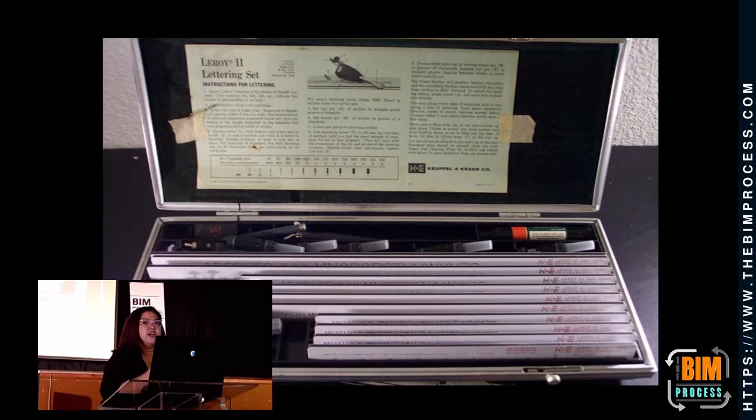So when I received it, I was so proud that it was passed down to me, because we also had other people in our family pursuing architecture and engineering. And I always look at it, and I can't help but think that that thing, in the old days when we had no CAD or BIM, was an innovation come to life.

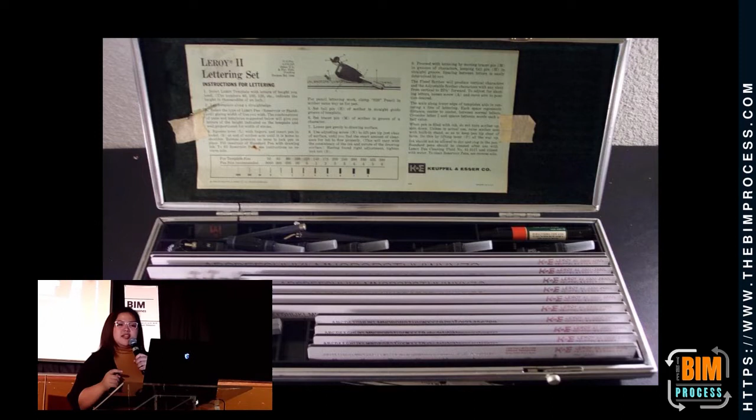And every time I look at it, I imagine all the times this stencil set has made my uncle's life easier. A simple thing helped millions of AEC professionals throughout the generations. And why was it made? Because there was a great need for such a tool in the old days.

In the old days, everyone drafted everything manually, and lettering was a great part of it. And in the times when you need uniformity, or your new drafters are not very good at lettering, this simple tool saved lots of architects and engineers' assets.

This gift of curiosity has inspired me to swim along with all the new innovations. And this is where I started growing more and more curious and explorative.

Throughout college, I incorporated different new technologies in my designs, even when people laughed at me, or my professors kept telling me, that's too expensive, that's not feasible. I got low grades for doing it, but I didn't give a shit.

I wanted to explore, and I won't let anyone get in my way, even though I'm so scared of failing, because it's my uncle that pays my tuition fee. And it's okay.

And in my thesis, I went all in. I designed a prototype, self-sustaining floating resort and marine observatory. That's so long, oh my god. Packed with all the latest technology.

And you know what I got for that? I got a 1.75 grade, because one of the jurors said, this is word for word, I will never forget what he said: 'I don't know what you're doing, so I can't give you a one, but I also can't fail you, because I don't know what you're doing.' And then he proceeded to write a three.

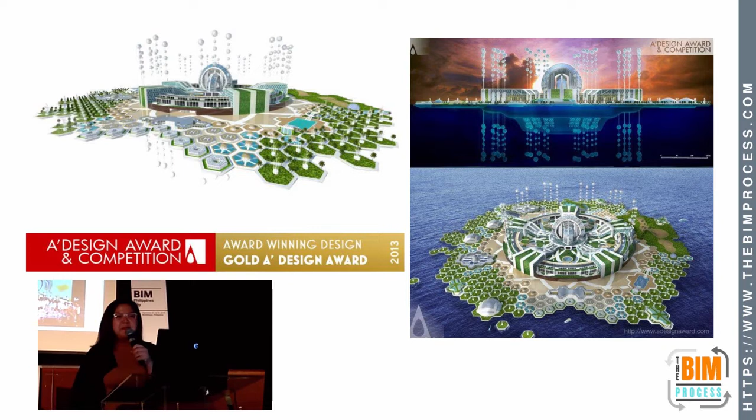I was pissed. But a year later, an opportunity came around and I was nominated for A' Design Award, and I won gold. I won the Gold A' Design Award for Modern Design.

And months later, I received an email from NCCA that I have to receive an Ani ng Dangal for winning in Milan. And this is where I realized that I will not let anyone who doesn't know what I'm doing get in my way. I'll keep exploring. It's my purpose to keep exploring.

And this is also where I realized that I need to share my gift of exploration with others. So here I am.

And when you come to think of it, this is all because of my Leroy stencil set. You see, along my journey, I also realized this: it's important that every one of us in the industry learn, observe, and appreciate the technological advancements throughout the generation, even in the past, the history of our processes. Because this way we will understand why we have the technology we have right now, and why we should pursue and champion the use of these new innovations.

Where am I going with this? You see, a lot of my students, before they enrolled in my classes, were terrified, overwhelmed, scared of all this new technology because it all seems too daunting, it all seems too much. And this is what I always tell them: all the things that have come out, the new softwares, the new applications, the new developments, they are all invented and developed for a need, as tools to make our lives better.

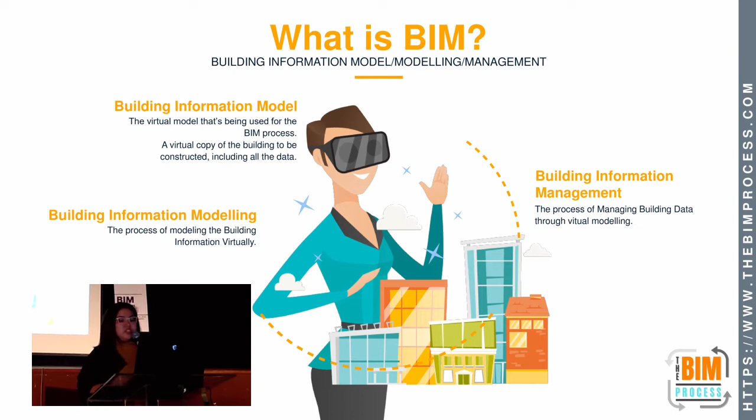A building information model is basically the virtual copy of the building to be constructed, but in its own way it's more detailed. But it's more than just that. A BIM model has embedded data inside every component - every information in the project, such as specifications, manufacturer data, design data, profiles, types, spacing, uses, functions, and more. It all depends on what's needed in the projects. That is the I in BIM, information. And in a way, you can also look at it as a means to model the building information.

And if done correctly, you will be able to use that model to automate tasks such as making construction schedules, cost estimates, procurement plans, and design calculations. You can also perform other crucial tasks such as clash detection, design simulation, climate analysis, structural analysis, systems analysis, cost simulations, and construction simulations. Now, there's something else I want to tell you about BIM.

BIM is not a software. It's not just a software. It's not Revit or Tekla or Bentley or SolidWorks. It's not a single software. It's a process that uses several different softwares to be able to construct a building virtually and automate the task.

Just imagine graphic design. You can't be called a graphic designer if you only know Adobe Illustrator. It's the same thing with BIM. You can't be called a BIM specialist if you only know Revit. That's not the same thing.

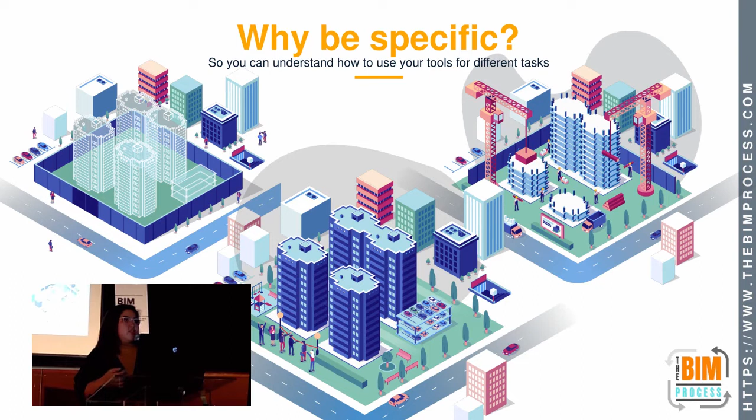So to understand a little bit more about the possibilities of the BIM innovations, what we will be discussing today is the pain points and how technology answered them. And to make it a little bit easier to digest, we'll take our journey throughout the project lifecycle. There are three basic project lifecycle phases: the construction phase, the design phase, and the operation phase.

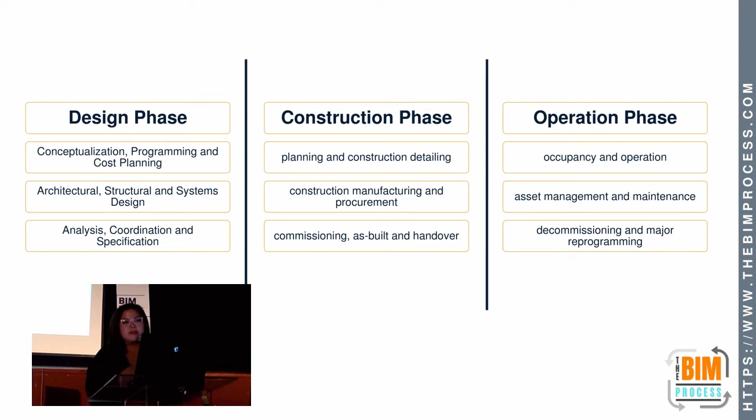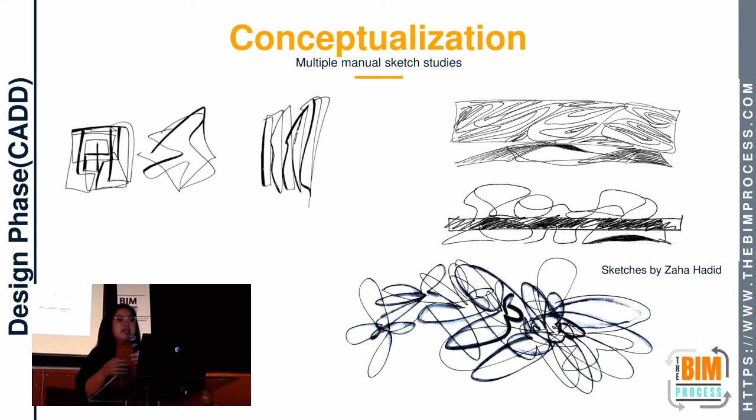In the design phase, we would start with the conceptualization. Once we received all the criteria, requirements, and other considerations from our clients, then start researching, sketching, brainstorming, and making space programs, matrices, bubble diagrams. It's usually a long creative process depending on the project size, and there's nothing wrong with it actually.

I still do this a lot of the times, but it could be better. We can have better tools that can help us visualize our concepts better.

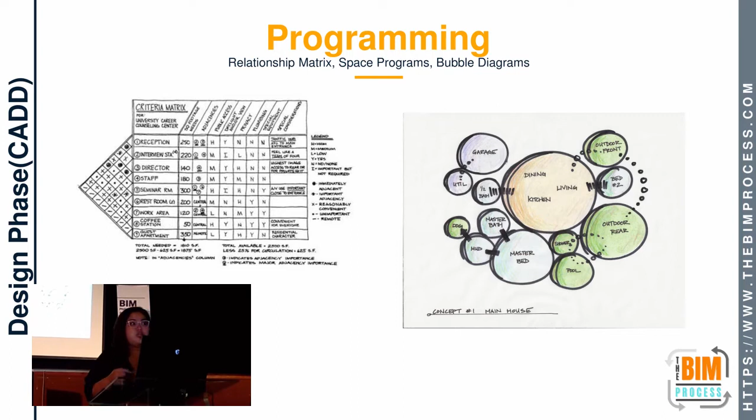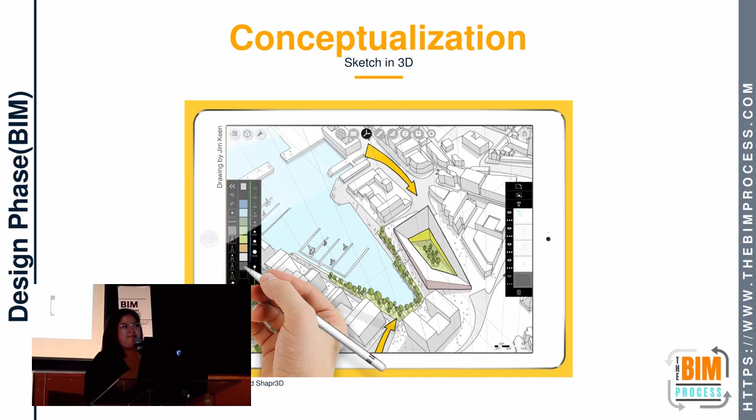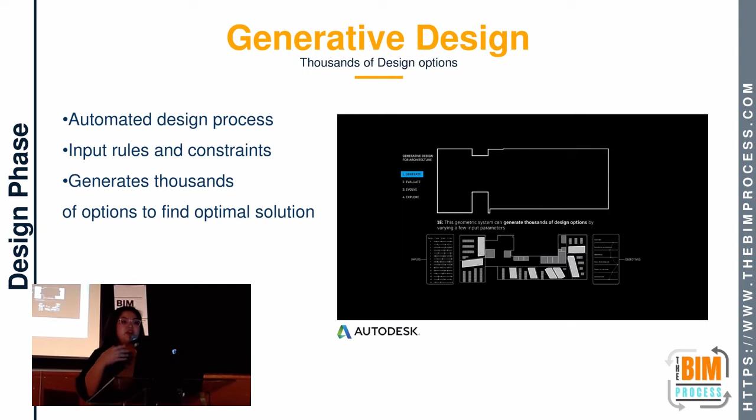But let's take that a little bit further. There's this new development in BIM called the generative design. This is basically artificial intelligence BIM. It's an iterative design process where you as a designer or a programmer inputs the rules, criteria, constraints, along with other factors such as performance requirements, functions, spatial requirements, spatial relationships, environmental requirements, cost constraints, and others. While the program generates a number of outputs to find the optimal solution for you.

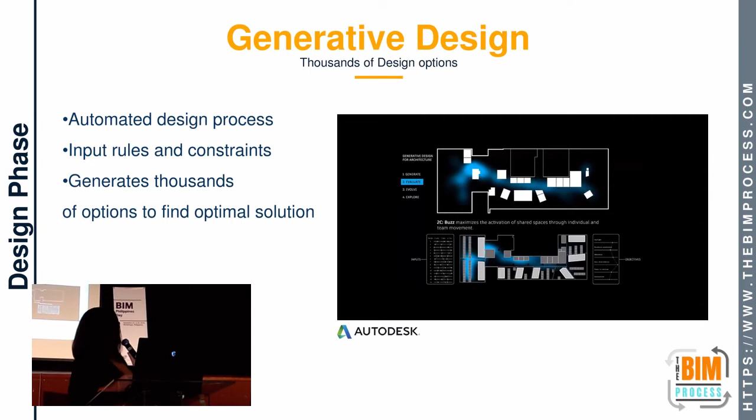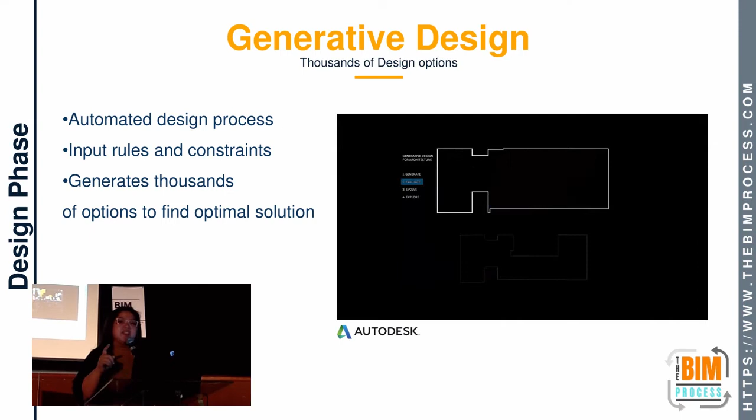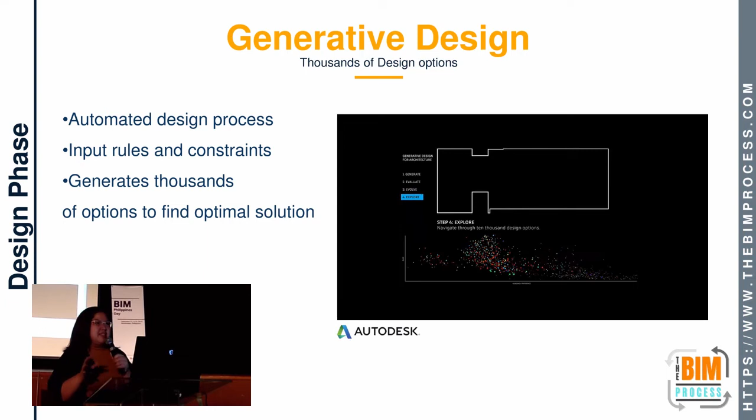Here's a fun fact. The video you're seeing right now is how Autodesk designed its Toronto office. So it is possible for a computer to take in all your thoughts and try out options for you. But this development is still in the early stages and mostly still experimental. But maybe in a couple of years it could be available to all of us.

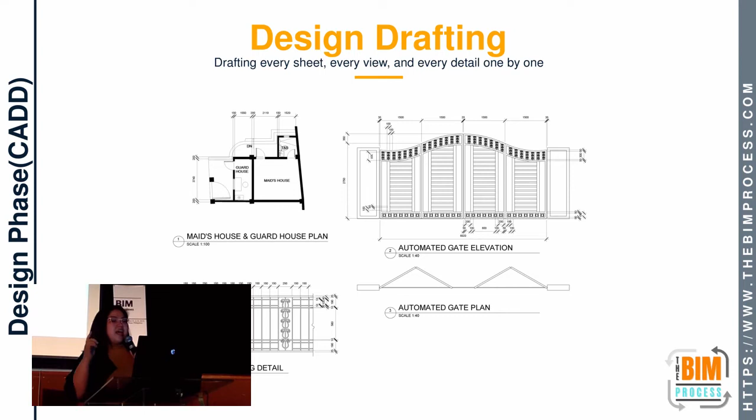So let's go to another pain point. Design drafting. Ever tried manual CAD drafting? It hurts. The way you have to draft every single view, every single detail, every single sheet from scratch, every time, one by one. That's so much. And what happens when you get revisions? You have to update every single sheet again, one by one. Be careful, you might forget something, but before you finish, your client comes with all new revisions. How does that feel?

But no, we don't really need to see the latest and the greatest technology. The very basic process of BIM answers this problem already. With the BIM process, and BIM softwares, all drawings, views, and details are derived from a single model. And a change in the model reflects in all the views and sheets instantly. Simple, fast, efficient, and when you get revisions, much easier.

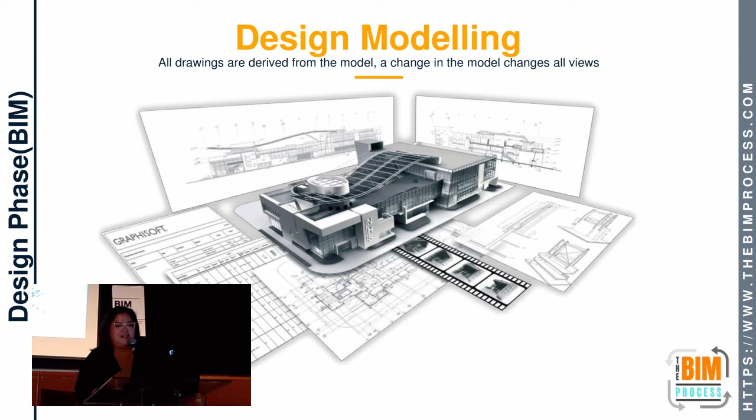Now here are the construction problems. With inefficient project planning, it affects the construction budget by a lot, to a point that it has been a normal practice for construction companies, for their protection, to allot a large percentage of the project budget, anticipating these mistakes when estimating costs. And even with that, a lot of the major constructions still go over budget.

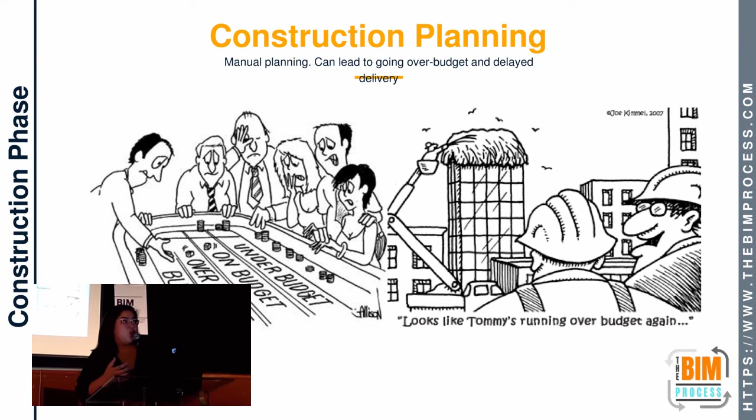And what about mistakes? Lots and lots of mistakes because of bad collaboration. I mean, seeing a cloud in your ceiling? Come on.

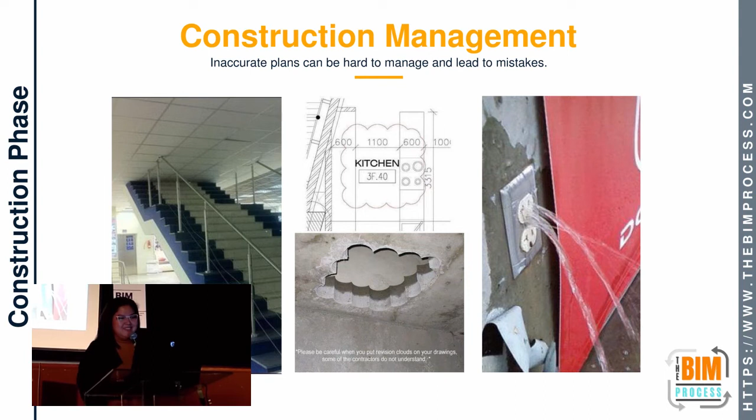Now let's see how these problems are answered with BIM.

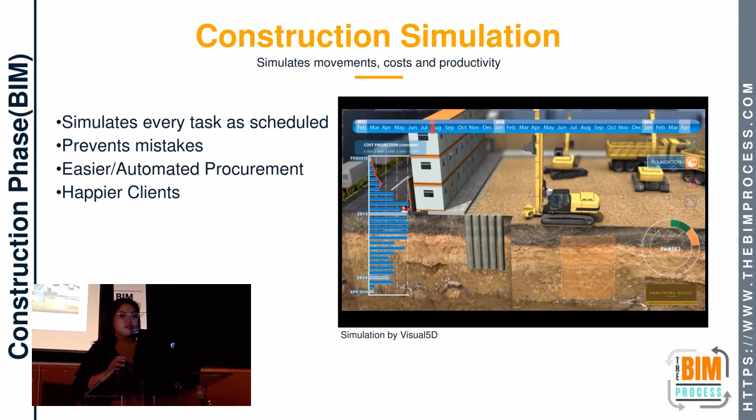In BIM, you can schedule the whole project phase by phase, schedule procurement for your materials and requirements week by week or day by day as you want it, get all your quantities in minutes, and also simulate the whole construction to anticipate any problems and plan every major movement every step of the way. You can plan your whole construction to the tiniest detail in less time. And as long as the models are done with that in mind, you can even automate the scheduling.

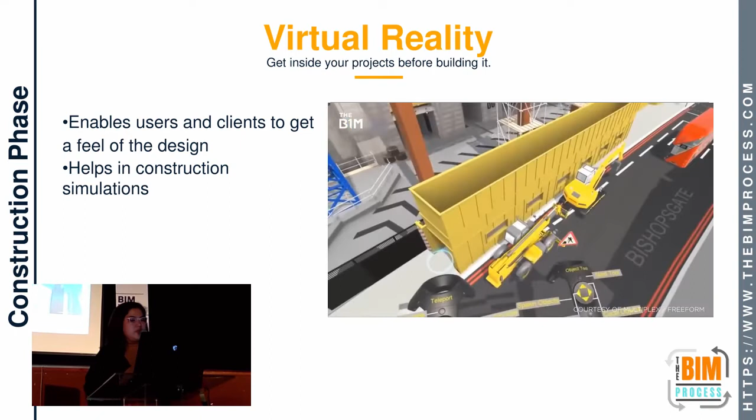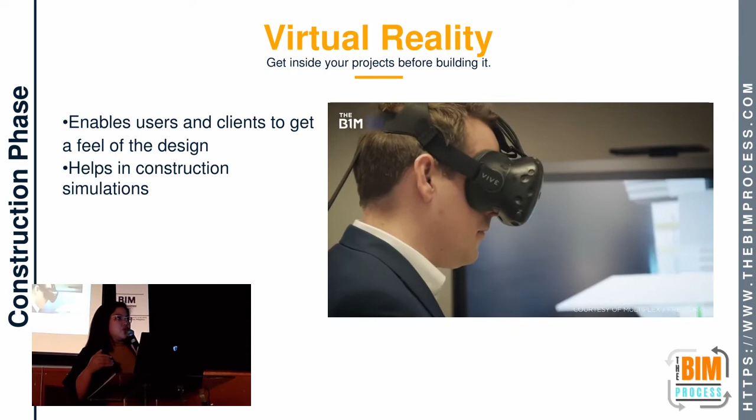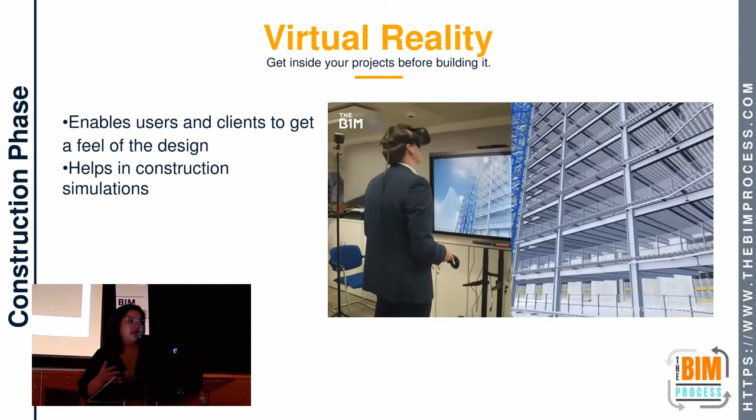Now another thing would be the virtual reality technology. This also allows the stakeholders to step inside the simulation and see how the construction should go in real life. This allows stakeholders to get a feel of the design and see the construction simulation virtually before they decide on anything or to start construction.

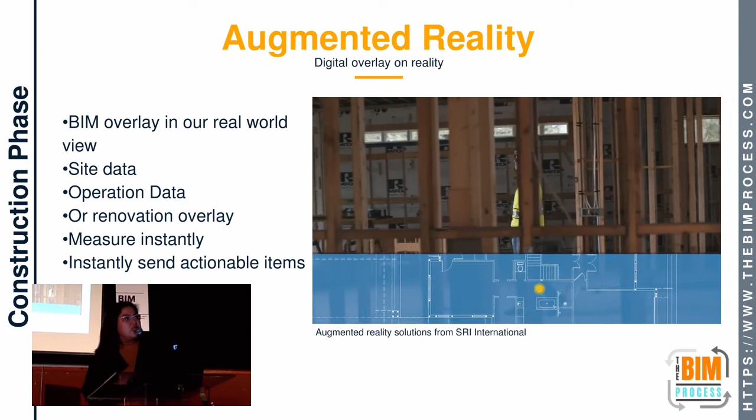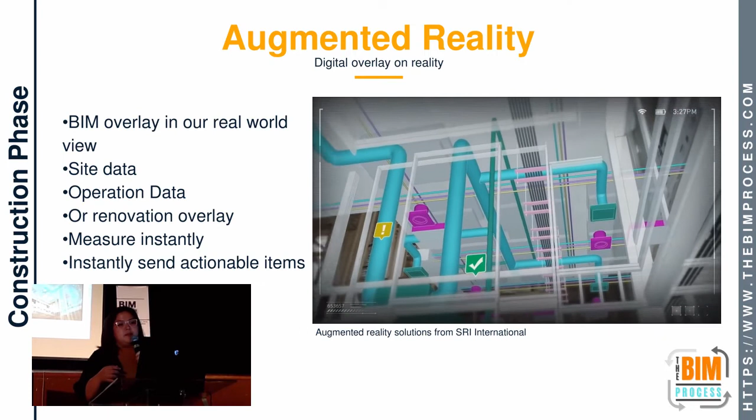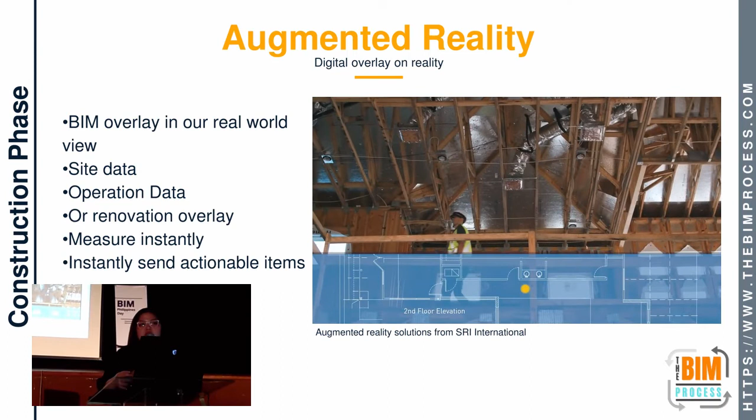And during the construction, we have augmented reality. AR applications can accurately track your location inside the construction site. You can also overlay the BIM model over what's being built to make the inspection easier. You can also measure automatically, and when there's any mistake, you can capture this data and share it instantly to other stakeholders. This prevents major structural errors. So if you can see there, there are overlays that alert them for mistakes.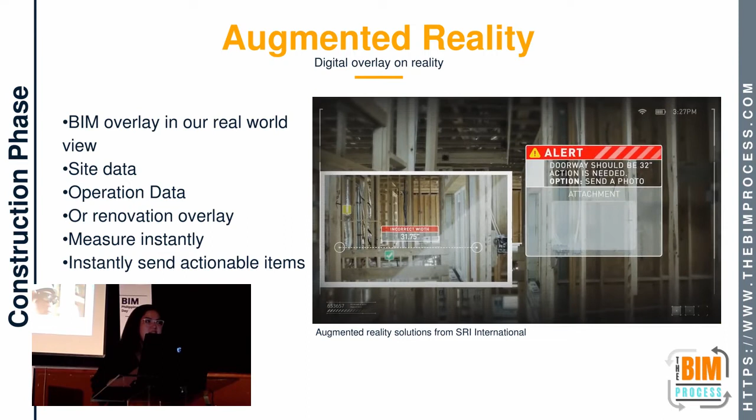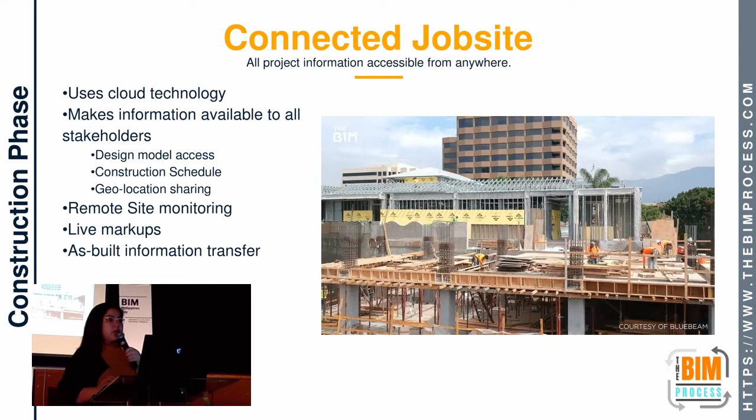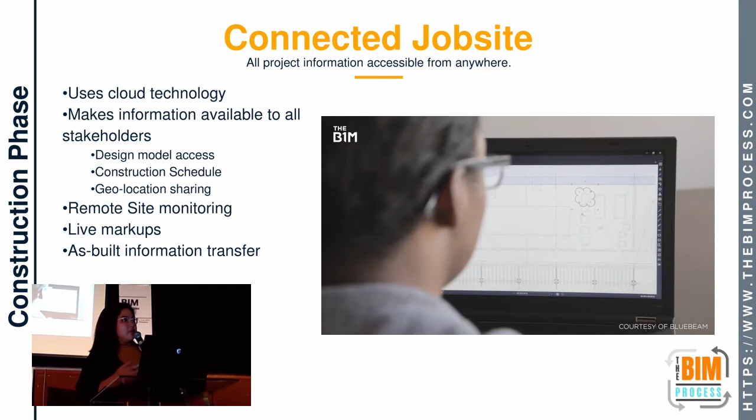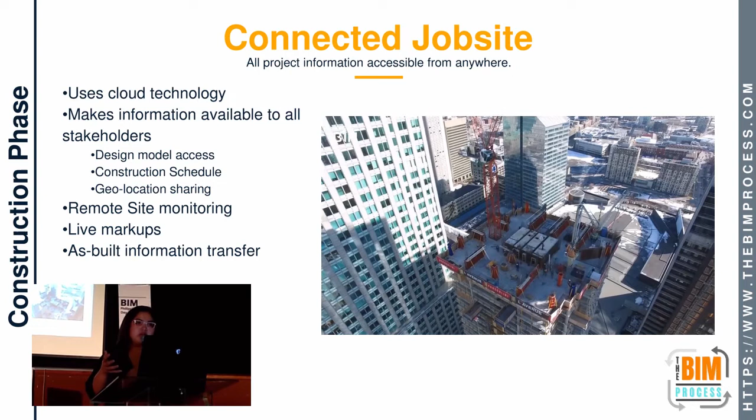AR is a part of the connected job site. With this, we use cloud technology to connect every stakeholder to the project site and to connect all the site managers to the model designs and construction information. This way, all information is available to everyone at all times, and this allows for remote site monitoring, sending live markups, faster problem solving, and as-built information transfer.

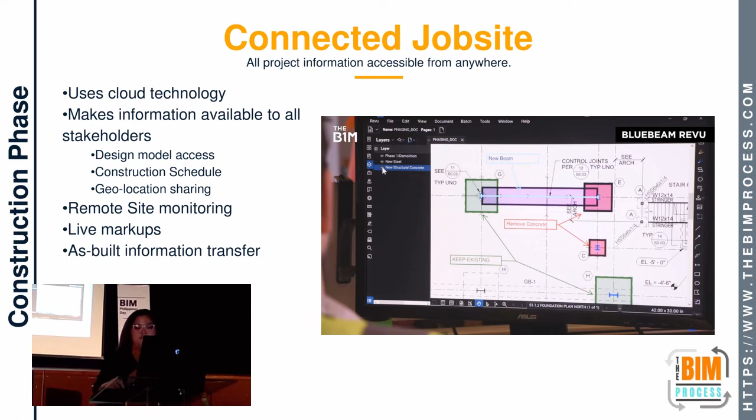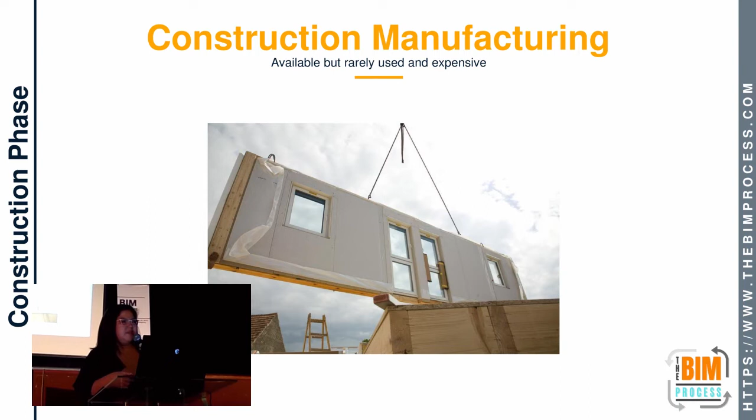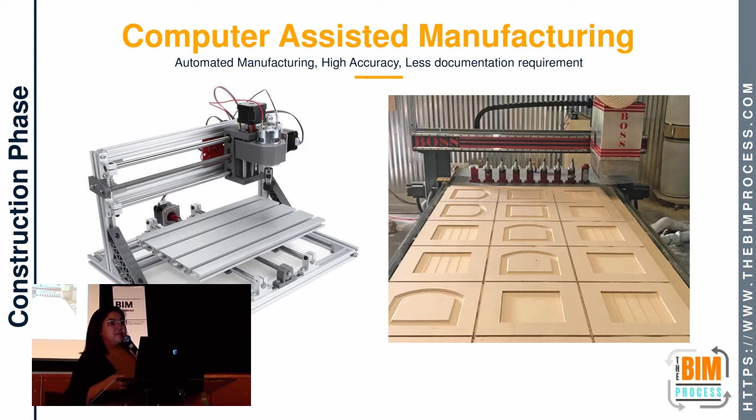What also helps the construction greatly is prefabricating and manufacturing. But in traditional methods, this is rarely done since this detailing makes it costly. But with the help of BIM, you can make use of computer-aided manufacturing to prefabricate your design pieces, just like Lego sets. Or you can also make use of 3D printing.

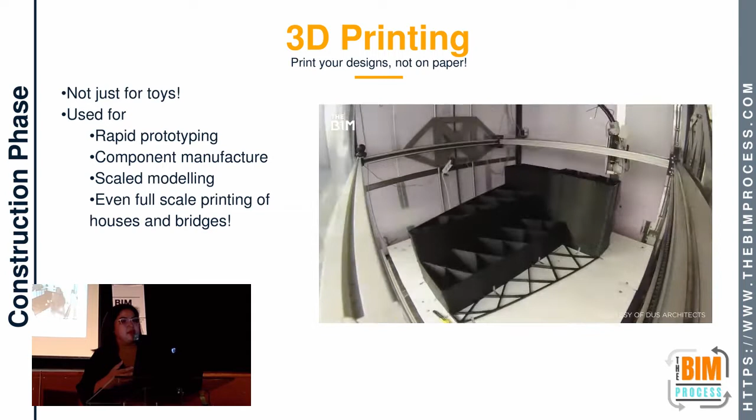A lot of people think 3D printing is just for toys. But in construction, it's used for rapid prototyping for your design, manufacturing different project components for easier installation, scaled modeling for presentations, and you can even use 3D printing for full scale printing of houses, bridges, and other structures.

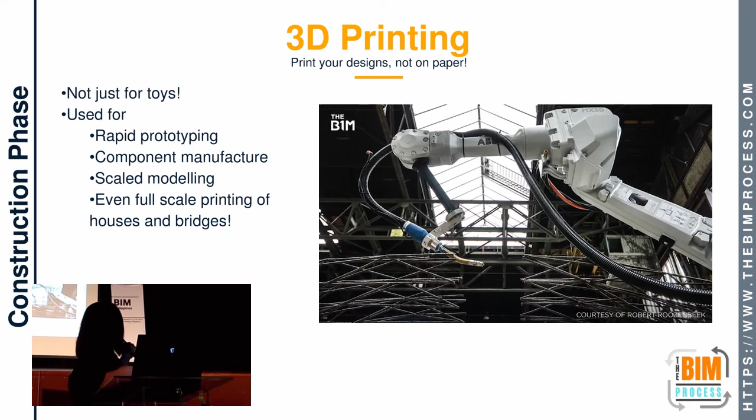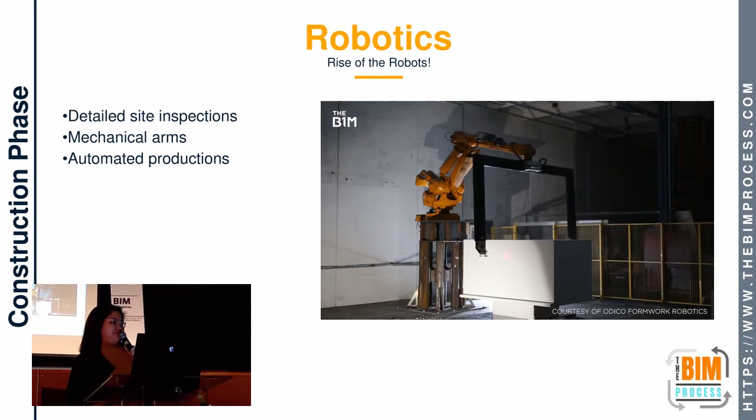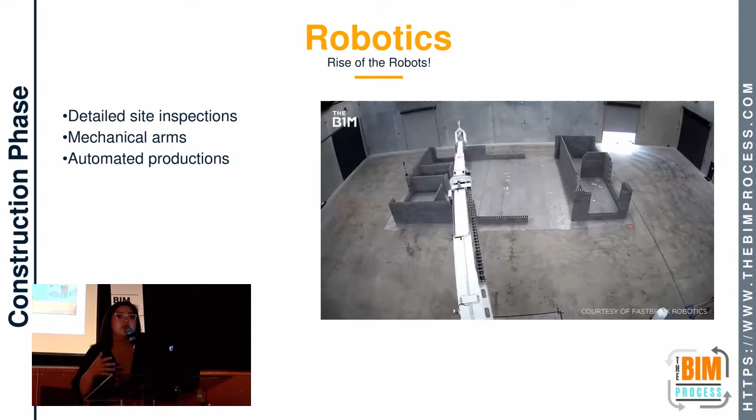Now this next one looks like science fiction. But robots are slowly creeping their way into our construction process in many different ways. From autonomous rovers that can scan the site to provide detailed site information, to mechanical arms that automate production, these new friends are making a great leap into our industry's future.

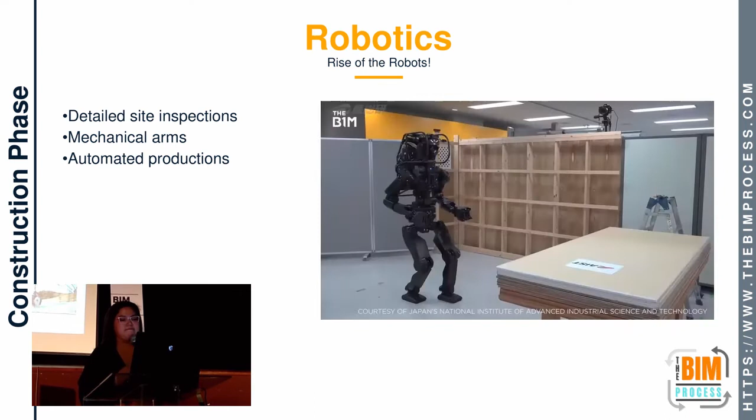So where does this take us in the cycle? We're now on the last part of the construction phase, as-built planning. The traditional method of as-built planning, aside from being grueling, is rarely really accurate. Thousands of measurements, weeks of surveying and inspection, and weeks if not months of drafting, only to end up with massive paperwork that's really impossible to look at.

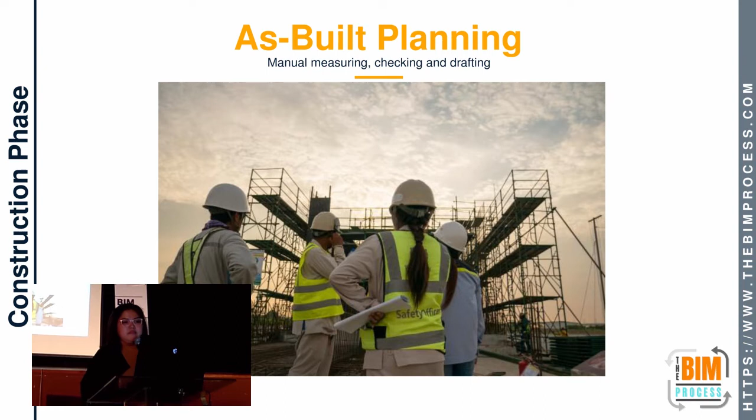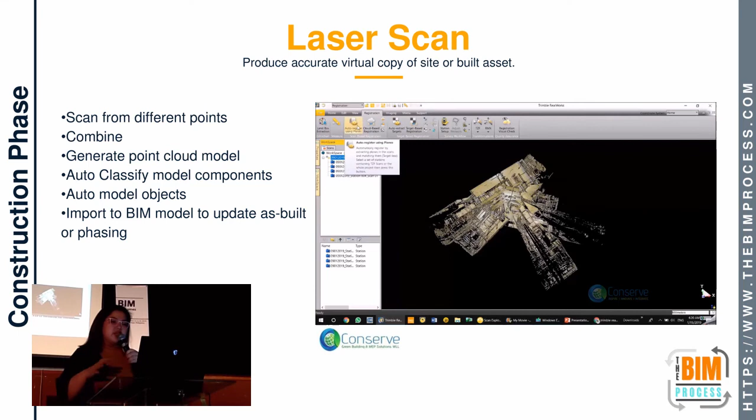But now we have laser scanning technology. This technology allows us to have an accurate model replica of our built asset or our site by scanning multiple points in the project. We would need to scan 360 degrees from different points in different locations in the project, and in application, we combine these scans to generate a point cloud model.

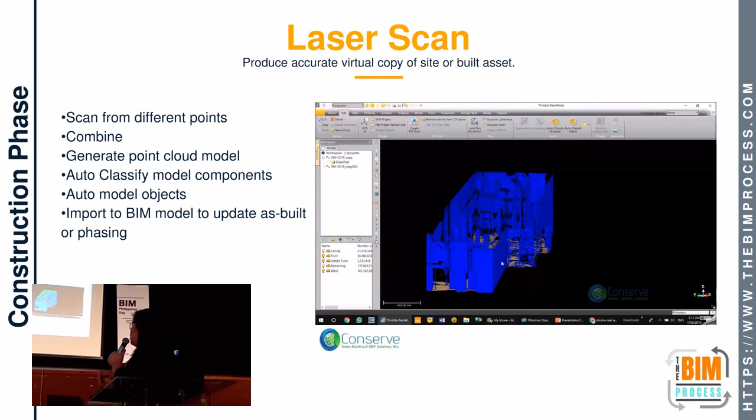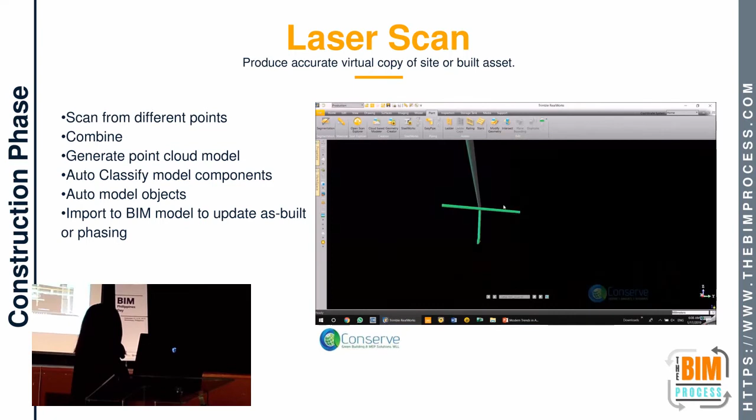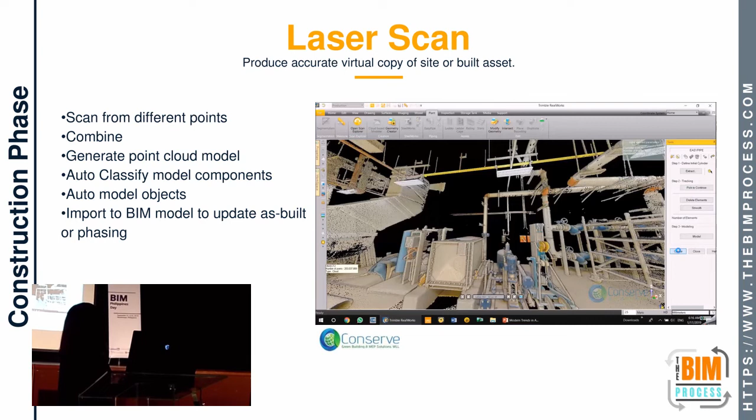The application also allows us to automatically classify building components. It classifies walls, ceilings, floors, and it also allows us to automatically model objects like pipes, ducts, fittings. And most importantly, we can generate a model and directly import it to our BIM model for easy and hassle-free as-built planning update.

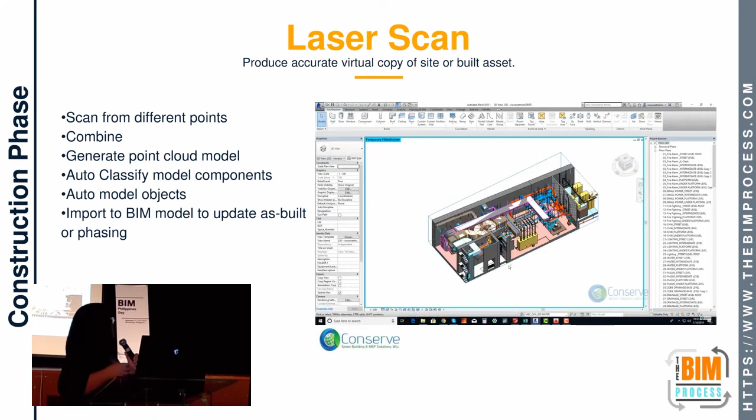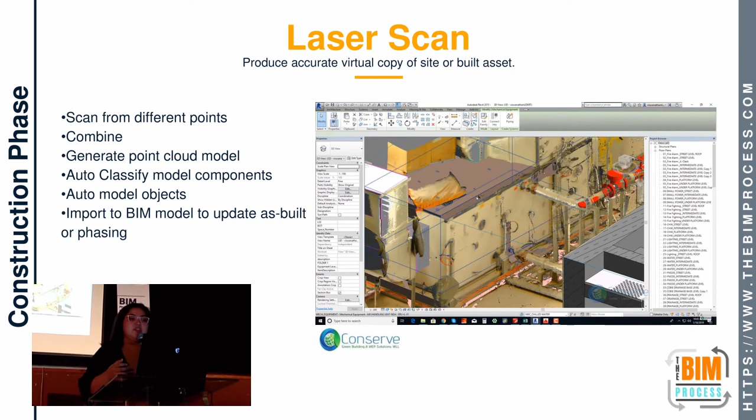But you might say that this technology is for larger projects only because of the price and the equipment and the software. But I'll show you a version of this that's way more suitable for smaller projects and way more affordable for smaller firms.

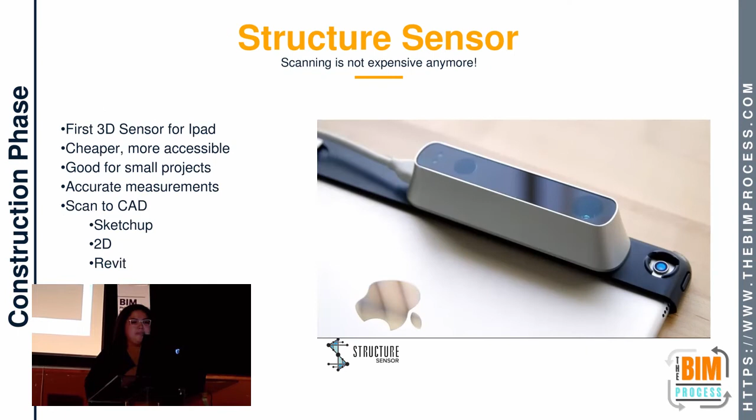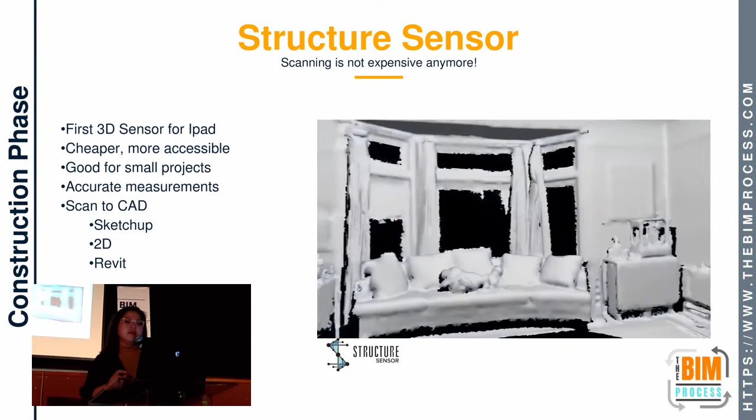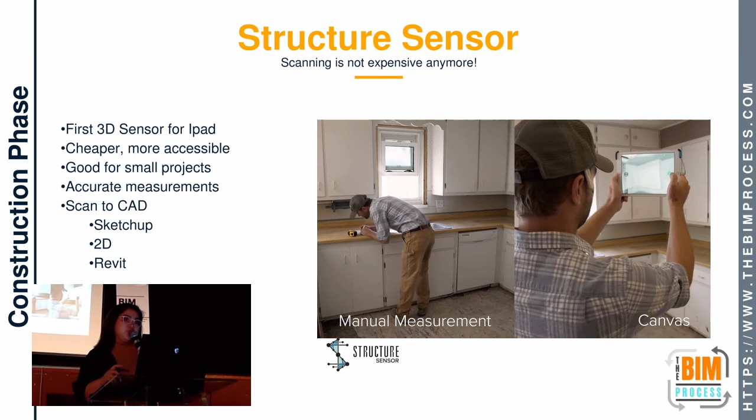The structure sensor. This little nugget is the first 3D sensor for iPad. The sensor itself can be bought through their website. You also have an option to have them process your scans and they'll send it to you in 2D CAD, in SketchUp, or in Revit format, depending on what you choose. This is great for small projects like fit-outs or renovations, or as-built planning of small-scale built assets.

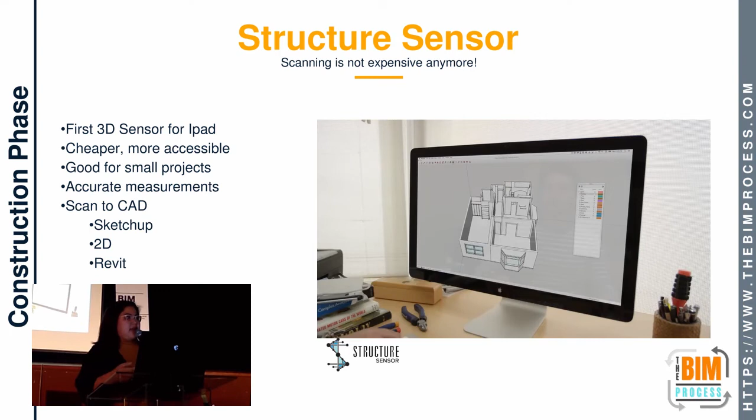Now we're getting to our last pain point, which is mostly our client's pain. In the operations phase, when you give your client paperwork that weighs a ton, do you think they'll bother using it? No, not really. They'll only use the floor plans, and it will most probably never be looked at. That is, if it was even handed over.

Because a lot of the times, facility data is not properly transferred to the client at the time of handover, because every part of the team is so preoccupied by all the other paperwork while finishing construction that updating the facility data gets pushed to the sidelines. And because of this, a lot of the data that comes up during construction gets lost. So in reality, the owners don't get much help from designers in their facility operation.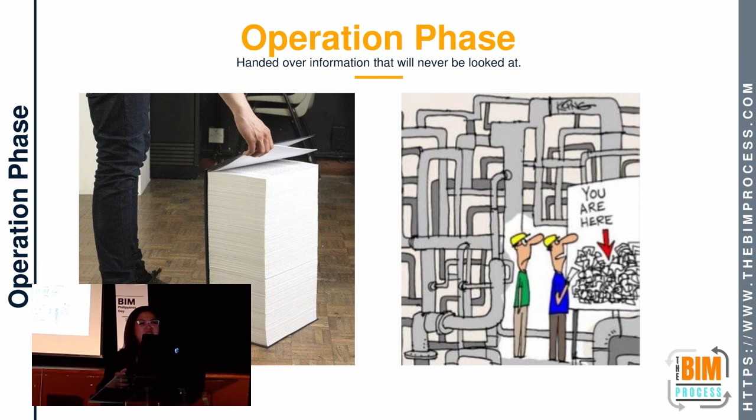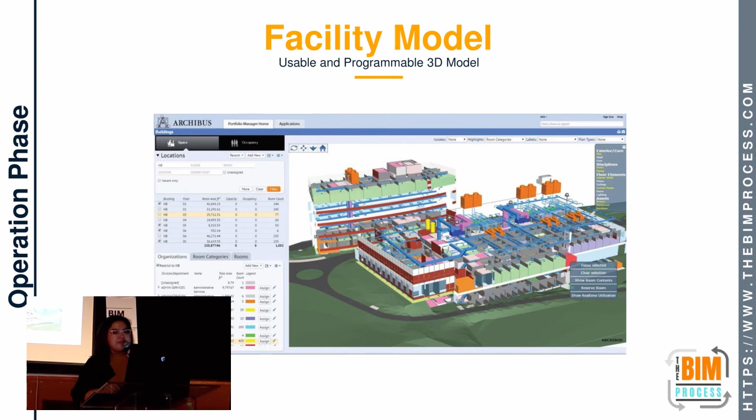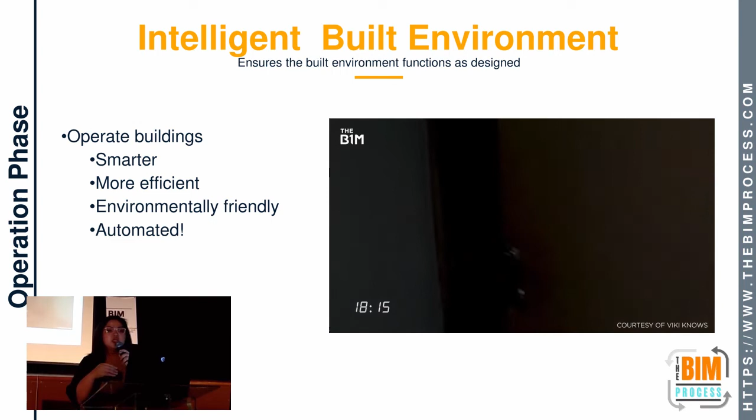This is one of the biggest reasons why clients with bigger projects require BIM, because they can use our BIM models and transfer them to become FIM models, which means Facility Information Management, and it can help them run their facilities. If you're a mindful designer, you can already think about this in the project design stages, so you can design an intelligent built environment that makes the operation phase smarter, more efficient, environmentally friendly, and highly automated.

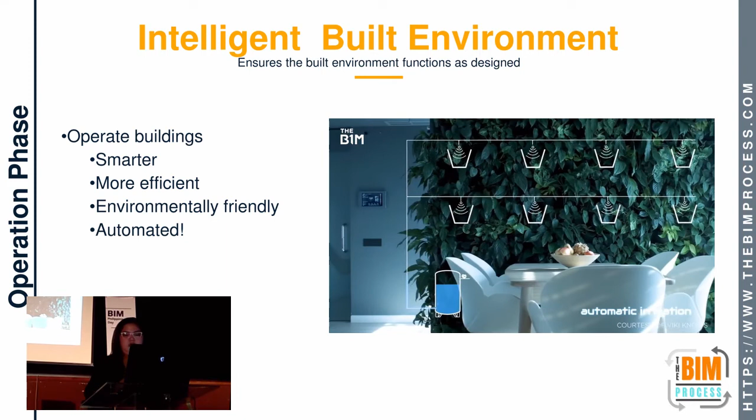So why are we talking about all this? As I said, as designers, it is our responsibility to provide our clients with the best built environment we can. And we have the responsibility to embrace and explore every new technology so we can stretch out the possibilities to make better designs. We have to take pride in our work. And like our great Zaha Hadid, we should use every resource available to us, maximize it, and make the impossible possible.

Now, after all this, you may be thinking, will I be replaced by machines? Yes and no. Yes, if you're still stubborn and you don't want to learn the new technology, you will be replaced, only because your skills become obsolete. But if you swim with the tide and make sure you're always up to date with the latest tech advancements, no. Instead of being replaced, you will have greater ability to jump even higher. Some jobs can be automated, but automation also produces more jobs, even higher paying jobs. So as long as you don't let yourself be left behind, you won't get replaced by all these new automations.